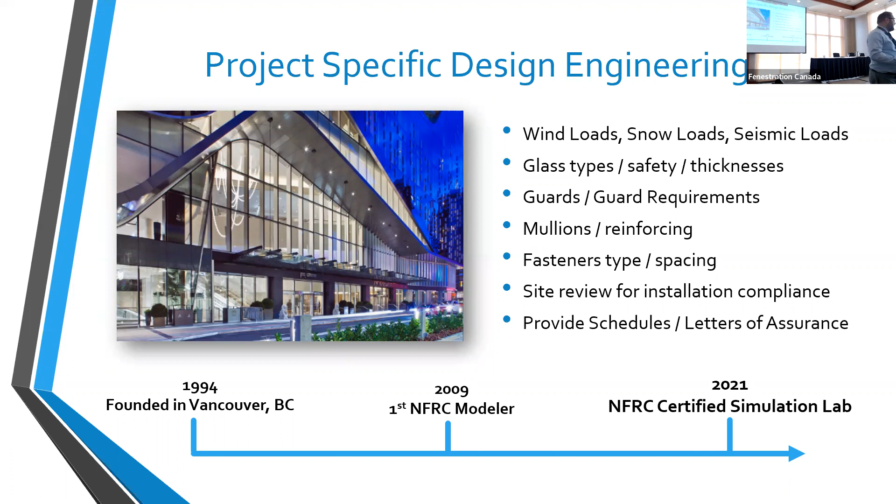So yeah, just to give some timeline of what qualifies us to actually speak on thermal modeling. We were founded in '94. In 2009, we got our first inquiry from someone trying to complete a project in the city of Vancouver, asking about a weird thermal requirement. It led to one of my partners, Ivan Chu, learning about NFRC, calling them up to ask what this thermal thing was. He went down to Minnesota, got trained, and that's how it started. Today we have six staff - one in Germany, Taylor located in Alberta, and the rest of us in the Lower Mainland - who are certified thermal modelers with NFRC. Last year in December, we got the thumbs up from NFRC that we are now a certified simulation laboratory.

One thing I've noticed, especially in thermal, isn't unheard of when you look at the window industry as a whole - we've all heard people say 'we did this 20 years ago' or 'that's how we've done it for years.' Obviously those days are done. We've seen increased industry requirements for guards, structural loads. NAFS was adopted by the National Building Code of Canada in 2010. Energy performance, both for products and whole buildings, has increased over the years - not to mention initiatives like LEED, Passive House, and Step Code. So understanding that there's a continual progression toward compliance isn't new, it's just that thermal seems like more of a newer thing.

On the West Coast, where there's a real drive to be the greenest city in the world in Vancouver, greenest province in Canada, greenest country in the world, everyone's being pushed to be more energy efficient. But the struggle is we want a fast way to do it - just tell me how and I'll do it. I don't think our industry is fraudulent or sneaky, it's just that there's so much information and we're so fast paced that we want to be told what to do. Cities like Vancouver often just say 'do this,' and there's this disconnect in information. That's where we want to come in.

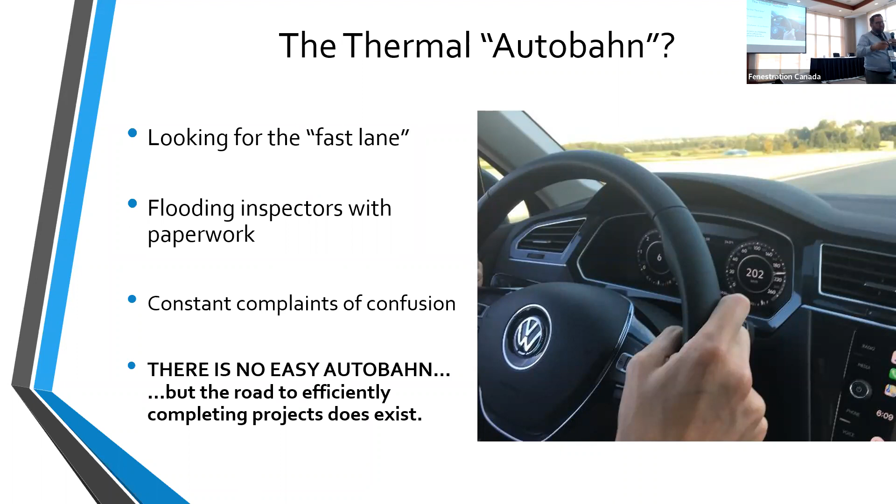First, understand that there's no easy Autobahn. I'm not going to be here and say, okay, do this, you're flying—but there is an efficient way to get this done.

And Taylor actually had a really good analogy when we started talking about how we wanted to frame this. He said it reminds him of Alice in Wonderland when talking to some people—it's like, I don't even know where I want to go at the end, I just know I've got to be thermal compliant. And it's almost like, well, it doesn't matter where you start if you don't know where you want to go. So we're trying to start right from the beginning to help people out, to really frame it around this drive on the Autobahn.

And there's different paths to go—we're going to get to a few different destinations, but on all of them there are some common checkpoints, so everybody is going to play in the same field at the same point. For some of you this is going to be new, for some of you this is old hat stuff.

So I just wanted to take a look under the hood—what is the NFRC engine? Why do we call it NFRC? The National Fenestration Rating Council—what is it really giving? Everyone has seen these stickers before, whether on your windows, at projects, or putting labels on for yourselves. The U factor and the solar heat gain coefficient are the primary energy performance ratings, so any system sold or installed in Canada should have that information.

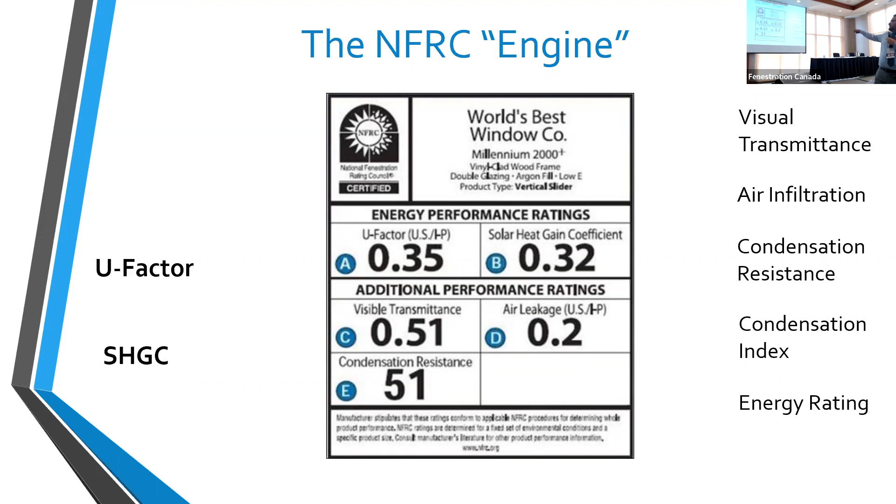Some systems are going to have additional performance ratings—some will have all of these, some only a few. But from our analogy, the U factor is like the engine, and the solar heat gain coefficient is like the transmission. It doesn't really matter—you can be excited about all the other stuff, but if your engine and your transmission aren't working properly, it's like, great, I'm not going anywhere.

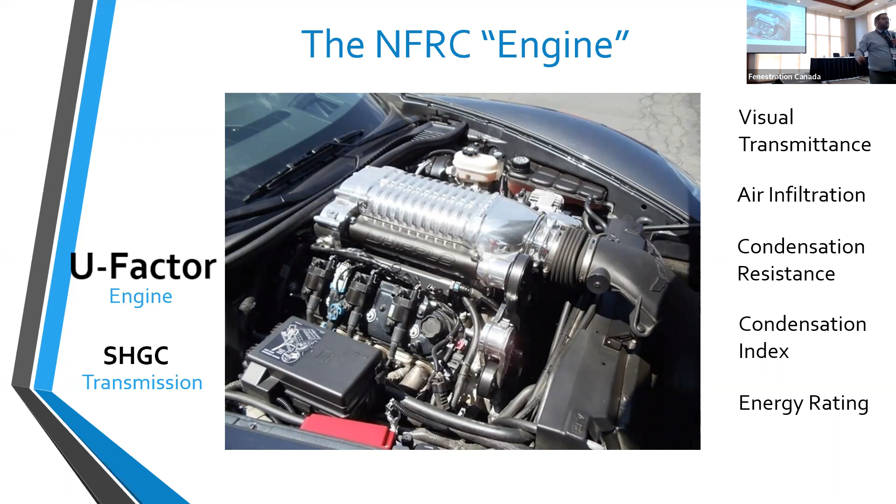And for the purpose of today, because U factor is seen as the primary thing we're asked about most—how do I prove this is energy efficient—that's where I'm at today. So what's the U factor anyway? Well, NFRC gives this definition: it measures how well a product can keep heat from escaping the inside of a room. The lower the number, the better a product is at keeping heat in. Like, okay, cool.

I found this graphic somewhere, and I've been guilty of this myself, of looking at it and just saying, okay, double or single glaze, that was bad U-value. Then we went to double glaze, then we applied a low-E coating. You kind of start thinking of it as a filter, like if we just put more glass, more low-E coatings, it's just going to get lower and lower.

But that's not entirely accurate, because how it's reported is watts per meter squared Kelvin, or BTU for imperial. Up in Canada, we're using that. Watts per hour, watts is joules per second. It's actually a rate at which heat is lost from inside. So think of it like I'm on the right side - the energy performance relates to conduction, convection, and radiation, but the U-factor is the rate at which this happens over time.

Looking for lower numbers can be seen as lower equals slower. So the lower the number, the slower you're going to have that heat loss. That's why we're like, yeah, get that number down. To put it in a complicated way that makes sense to me, it's the heat transfer per amount of time, per area, per degree of temperature difference. So you have those three components, but it's a rate at which it happens.

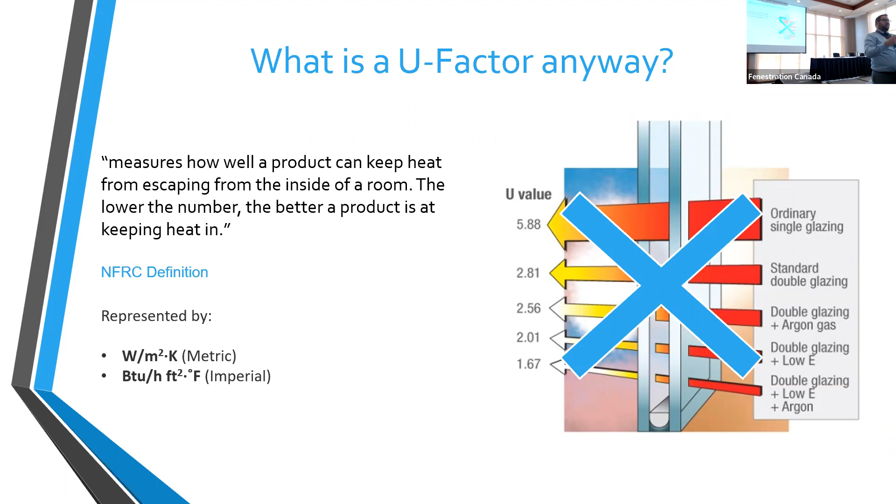So the filter idea is a good way to think about it and also to present it to people, but it's not entirely correct. So here we are.

Why NFRC? Well, long before my time, if you had a product and you wanted to sell it, you'd say, hey, this is rated, don't worry about it. Anytime you changed any little thing, there's a new test, and tests sometimes weren't all comparative. It led to people being confused and frustrated, throwing their hands up, or even just ignoring it - well, I don't have to do it over there, so I sell these windows here. Why the heck am I even doing that? I'm not even going to play in that field.

And I've seen, hilariously, some really old reports with giant IGU units, and that's the reported U-value for a window - it has nothing to do with the frame. Then someone else actually tried their best to come up with the rated size, and I'm like, no wonder that guy's business went out from under him. He couldn't compete, trying to stick to the rated size. So NFRC really came out to benefit both our industry, to be able to compare apples to apples, and the end user to be able to make the best choice of what's the best window.

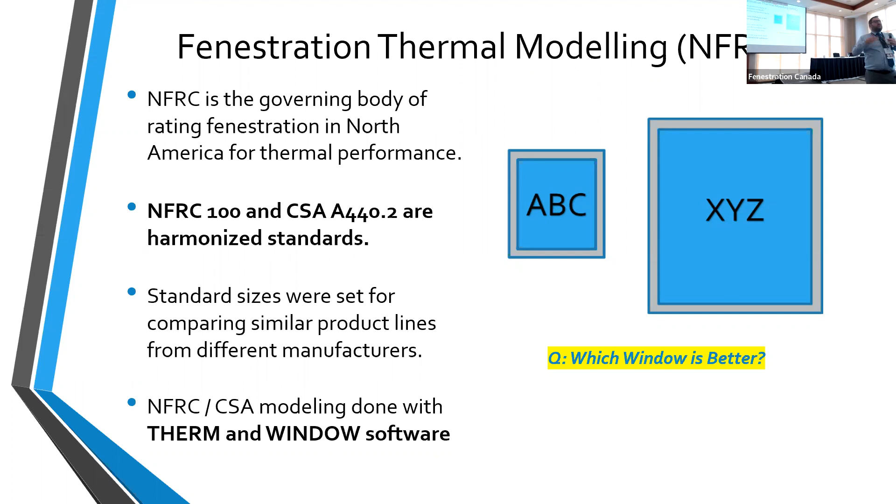To be certified, you actually have to go - well, they did Zoom over COVID, but we all go to Minnesota, we do training once a year, we do a test. Also as a lab, we do another test. So we're always kind of being vetted that we're doing it appropriately, because material properties change. Some modeling things have changed over the years, so there's things you have to keep up on to make sure it's accurate.

And as I said, there's standardized sizes, and these have also changed over time. CSA was slower to adopt a dual action window than NFRC, so when we're comparing everything, like a tilt and turn, no matter what your product is, if it's rated or modeled, it's to this size under NFRC or CSA. The U-factor is used to answer the question: how energy efficient are my windows, based on these sizes.

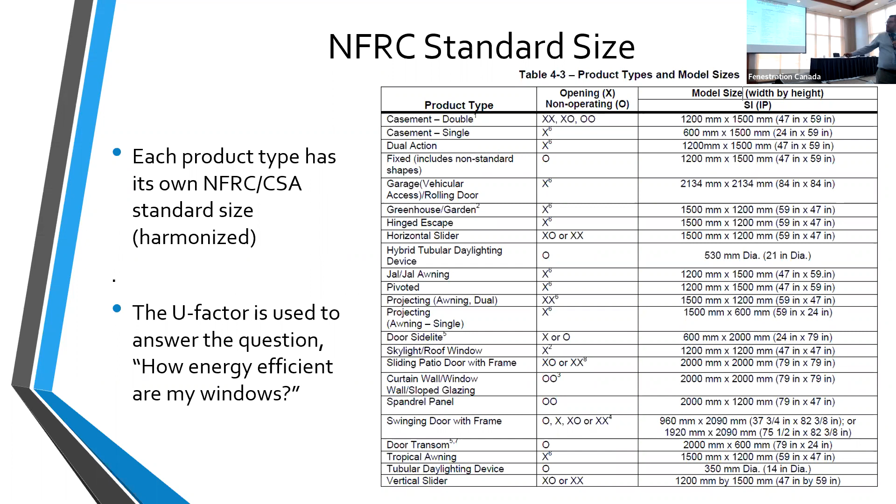So just to get your breakdown on how a U factor is calculated. Each product consists of 3 different U values. Essentially, you have the center of glass, which is going to be your best performing. That's like when someone has a double glaze with a single low E.

The next thing to adjust to try and get the biggest bang for your buck is an interior low E, or going to triple glazed. That being the lowest is always going to perform better than your frame. And I say that always. Maybe one day I'll be wrong, but as of yet, I've never seen a frame outperform an IGU.

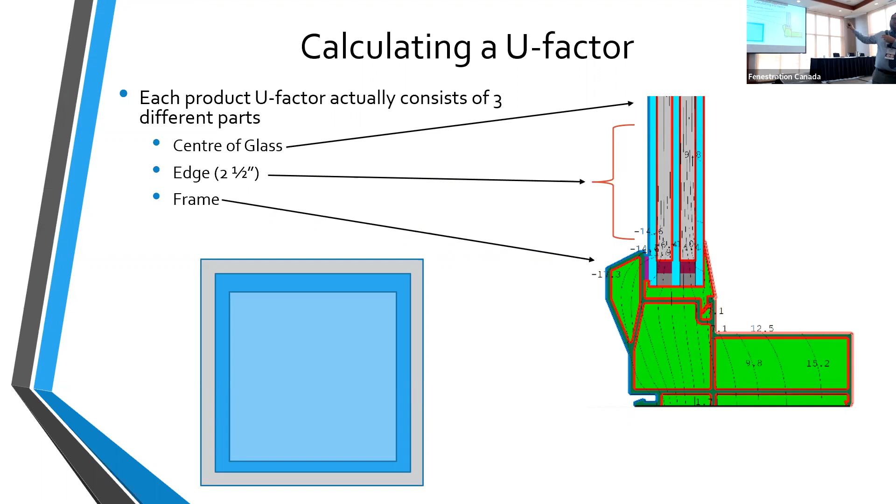And then there's this edge difference and the frame, as I was saying, was the worst performing area. So there's this, in general, this 2.5 inches where it's this mixing of the poor and the better. And all those go into a final U value number, and each side of this frame. So you'd have one of these models for the head, both jambs, and the sill.

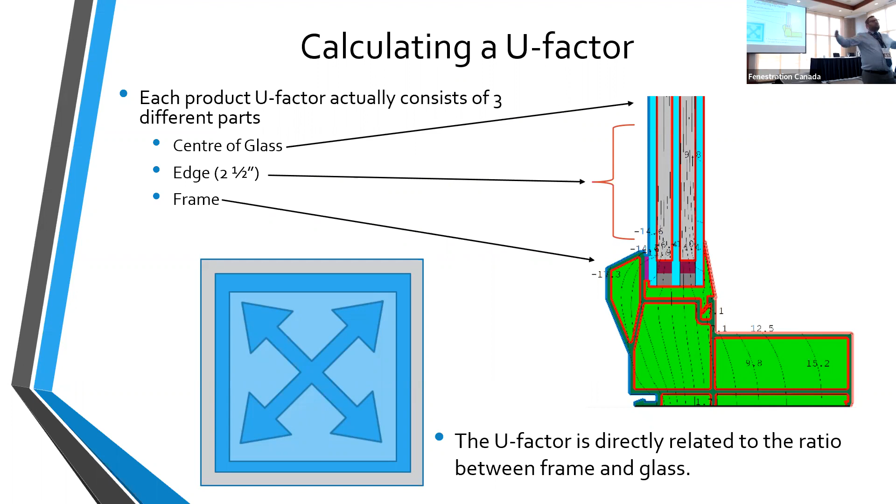And as I said, it has to be sized to a standard size, because the U factor is a ratio, like it's influence of glass to frame. So if you had a huge window, it will inevitably perform better than one that's smaller.

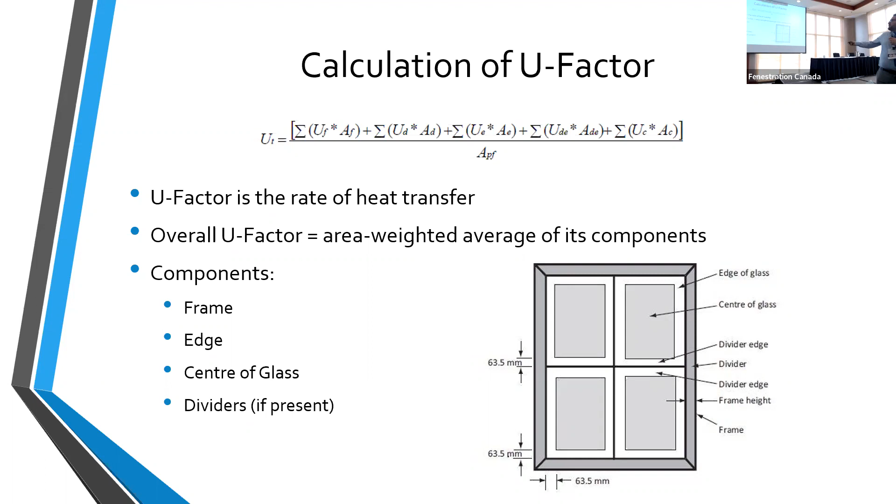So just to show you the math behind that, explaining what I have, this one actually has a true divider, so you would have more models in it rather than just the 4, but it's the same thing. You've got the frame, the edge, the center of glass, and that's U value total over the area of each part. So it's kind of like an area weighted average of each component to a standard size.

And then this is just to show you as well, we just took a random fixed window. The standard size is a width of 1,200 millimeters. And we just said, okay, what if the width's really small? What's our U value? You can see that the smaller it is, the worse it is. And as it comes down, it gets better and better because that ratio increases. But everybody who's reporting on a frame would be somewhere on just that 1,200 line. So that's the standard size. That make sense? Yeah? All right.

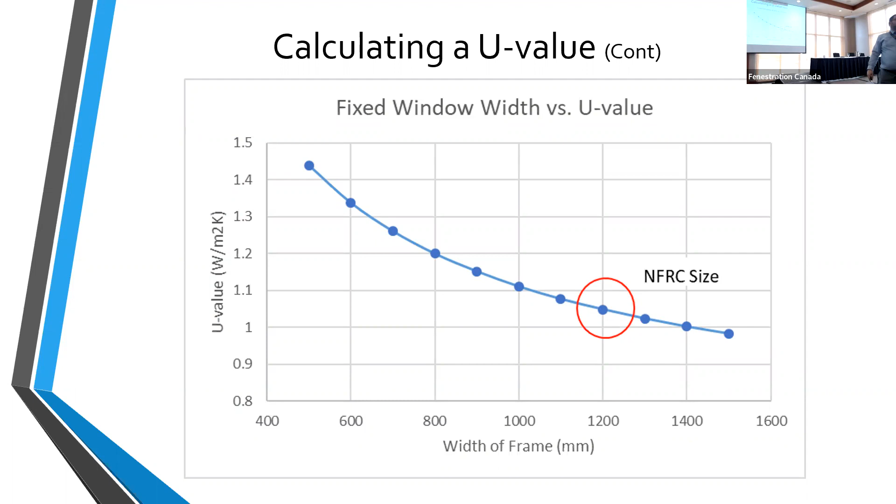Oh, is there a way to get rid of the little thing? If not, it's okay. It's all good. Oh, there we go.

Okay, it disappeared. So, like I said, we wanted to talk about those common checkpoints. Really, thermal modeling software is to be used for all products sold and installed in Canada and the US. That's where we start.

If we want to give both our end users what we say we're giving, if we want code officials, we want city municipalities to just continue to let us sell our products. If we want to sell a better manufactured piece to window suppliers, maybe you're a supplier of a component or you're a supplier of frames and stuff, all this stuff can be modeled previously to even accepting a project. And that's what we see every day in Vancouver and in British Columbia.

So the nice part is it validates that thermal performance. It fairly compares between products of the same type, and it's recognized by everybody, really. And I know exactly what I'm looking at. Architects are starting to understand what they're looking for. And the governing and regulatory bodies are really asking for these values.

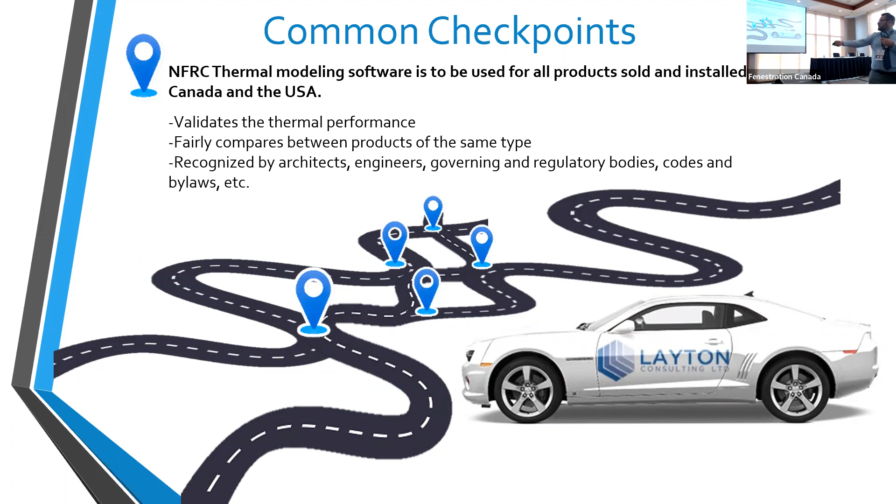There we go. So some of the dangers we get into. I've lost the notes. All right.

The alternative modeling methods. So when I went back to some of that confusion, I put HOT 2000 in here. HOT 2000 is not a reporting tool, but it still catches me off guard. I'm dealing with a project right now where an architect says to me, well, I've got the U values, don't worry about it, gives me a HOT 2000 report. This has just been selected by an energy modeler. This isn't representative of anything of what you're putting in. But he was convinced that was the windows that he was getting.

There's other energy rating software. There's stuff that exists. I don't know the names of all of them, but I've seen people use things. Some are fairly accurate to what we see, but they're not consistent, nor are they validated. I see a lot of manufacturers like dynamic Excel spreadsheets where they can have a customer or a consumer pick the frame, pick the glass, and it spits out a U value.

That's a great place to start. But because of that need for validation—and it's sometimes quite accurate—it should be seen as an estimating tool, especially if you're going to sell a product. Like, okay, I don't have time to look through everything, but I want to know, am I going to get there? Am I going to pass? And if the threshold number is 1.4 and you use the spreadsheet and you're getting back a 1.2, you're like, hey, no problem, I'm good, I know where I'm going.

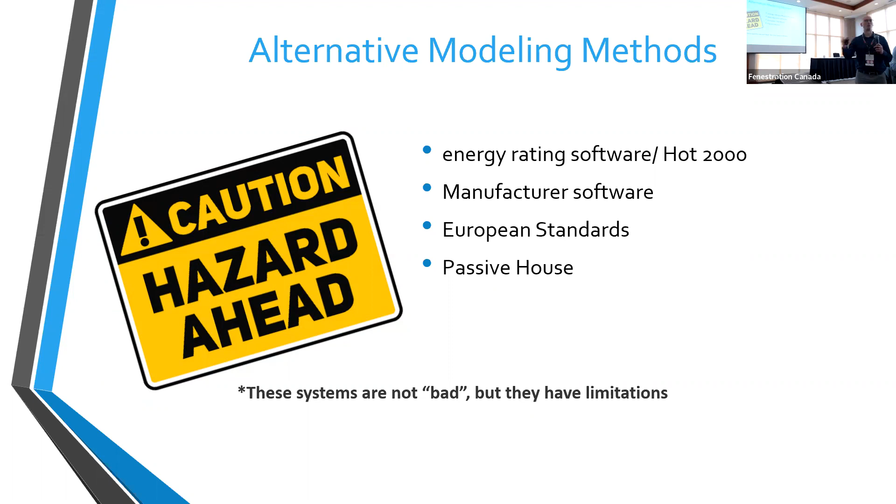Yeah, so John's given a really good overview of the North American way, the methodology of calculating U value. That's not the only standard way of calculating U value in the world. As many of you know, there's the European way. Passive House is probably the most common. Many of you have probably been approached or talked about how people have said, oh, their U values are way better, or I have to import from Europe, or whatever, and they're just not the same. I guess is what we want to get to. It's not an apples to apples comparison, and we're just going to touch on this briefly.

RDH Building Science—Robert LePage, Daniel Haaland, I'm sure many others at RDH—have worked extensively on this and have given some really good presentations. We just wanted to go over some of the material they shared, and give credit where credit's due there.

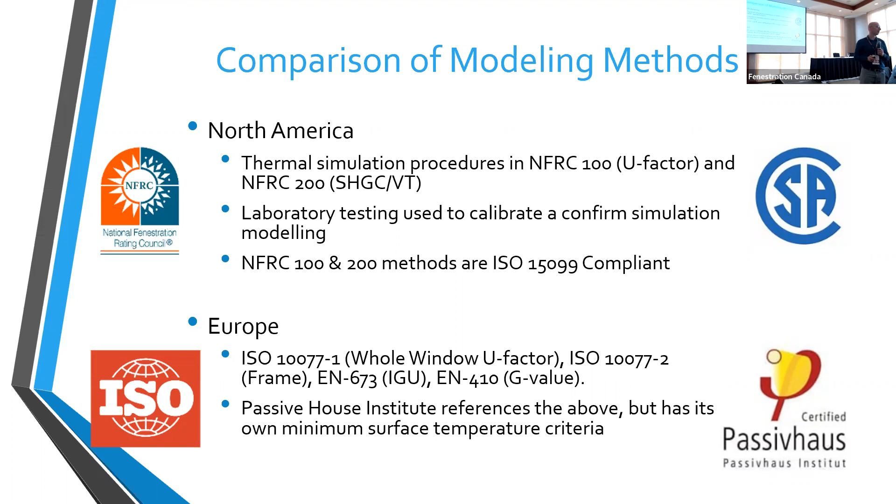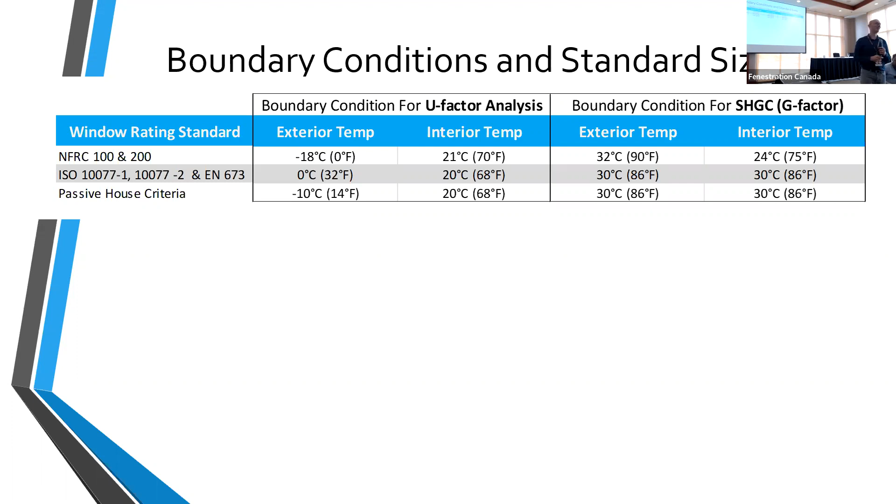So to touch on a few of the differences, one is their temperature difference from outside to inside is different. With NFRC, the outside temperature is modeled to be negative 18 degrees Celsius, and the inside is 21 degrees Celsius. In Europe, it's a different temperature differential—it's either 0 or negative 10. There's nuances there, just so you know that's one difference.

The standard sizes, as John talked about, each window type has a standard size here in NFRC. They also have a standard size in Europe. They do not always match up. That would be a nice thing to harmonize, but it's not. So obviously when you have bigger windows, which oftentimes over in Europe their standard sizes are larger, it makes it easier to get a lower, better U value.

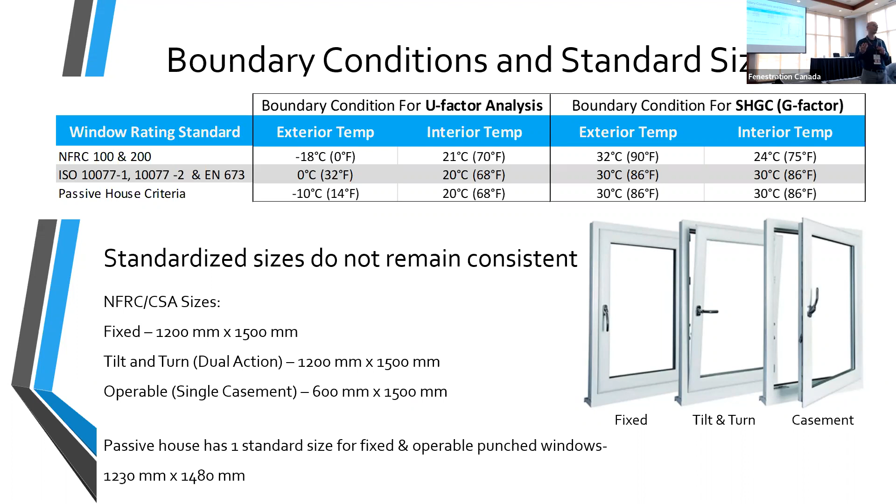The air gaps—you might notice in Europe their IGUs seem to have a lot wider air gaps in between. It all comes down to how they calculate their center of glass U values; they follow a different standard. As you can see from these charts, NFRC hits its sweet spot for double glaze around a half inch. Passive House can get a lot lower U factors if they continue widening that gap a little more, so they bottom out at a different sweet spot.

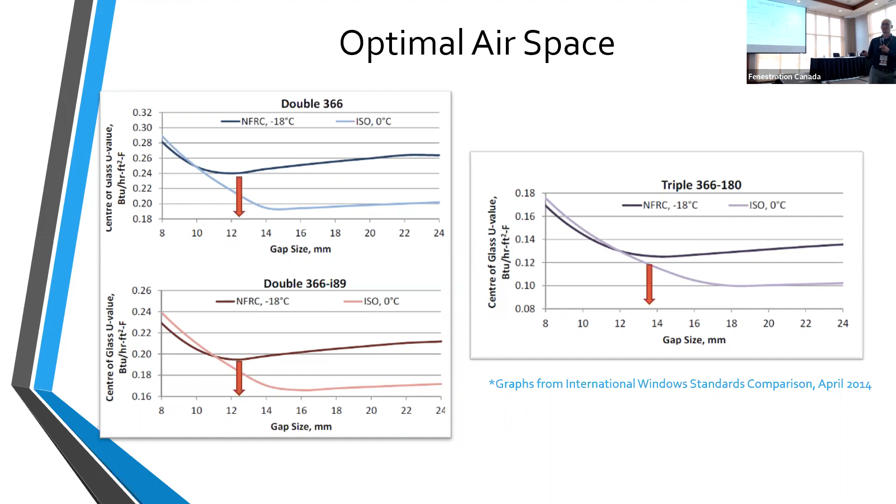So that's the point where we like to hit for double glaze in North America. John talked about the three main areas with NFRC—you have the frame area, the edge area, and the center of glass area. Passive House is different. They have the frame area and the center of glass area, but those aren't necessarily calculated the same. And for the edge value of that transition area, they use a different linear value—it's not actually an area, they call it a psi value.

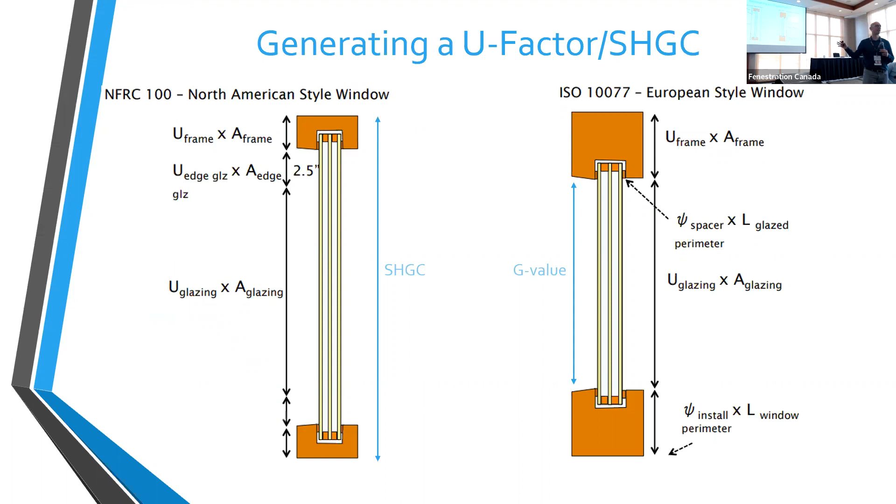Another difference is the solar heat gain coefficient. NFRC takes into account the energy that's passed from the solar heat gain through the frame, and Passive House doesn't really touch that in their calculations. So all kinds of differences.

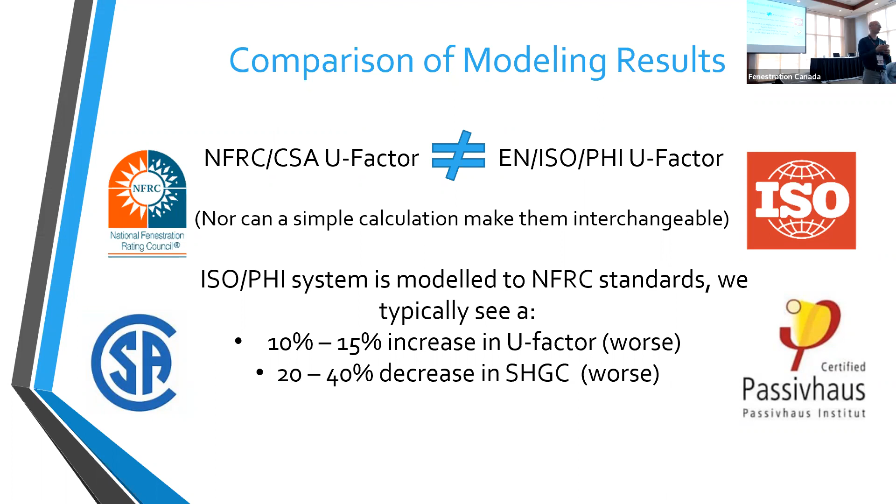And we kind of expected, because what we've seen is generally Passive House reports lower numbers, so better U values, but then when we model in NFRC, it jumps up a bit.

Which is often disappointing for people who are importing over from Europe, and then they find out their windows aren't that amazing. But looking at different windows, more standard North American windows and standard European windows, they found that there's a difference both in the positive and negative direction.

It's hard to say which way it will go, but they came up with up to 18% differences, and that's, we typically see around 10% difference, but it can fluctuate between 10 to 20% difference in U factors. And it's not better or worse. It's kind of like what my mom used to say. She summarized this very well when she said, Taylor, you're not better or worse than the other kids, you're just different. So yeah, that's how you can look at Passive House and NFRC.

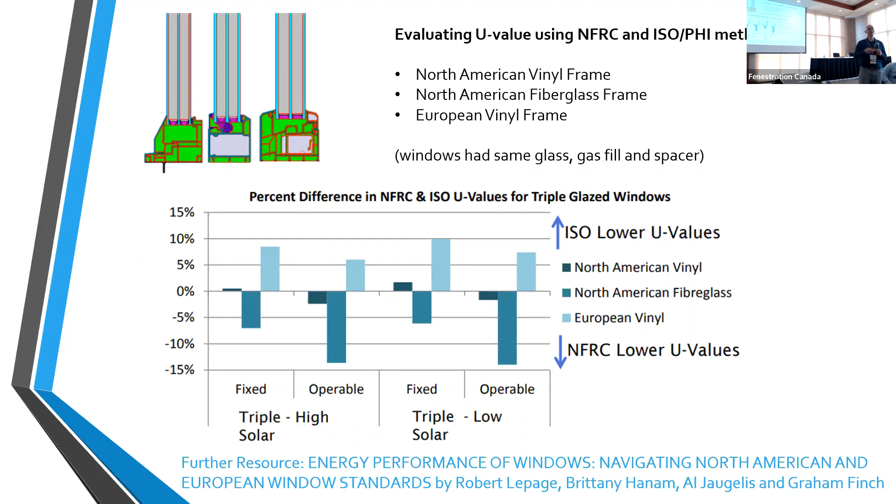And for the rest of this, we'll be focusing on the North American standard, NFRC, as well as CSA, as that's what's relevant over here. But we just wanted to touch on that for you. So let's take a little pit stop to...

We could talk on this a fair bit, but we wanted to bring in the real experts. John at Keystone, they've been in the industry a lot longer than we have, and they're IAs, so they look at all the modeling that comes in and all the tests that come in, and they certify those tests and modeling that come in, so they really know what they're talking about when it comes to NFRC and CSA standards. So John, I'll hand it over to you. I appreciate you coming in and joining us for this.

Thank you, and thank both you guys for the opportunity to just walk through a few slides together about this common checkpoint along our highway to compliance, and that is third-party certification.

All of these programs that are becoming more and more important to fenestration manufacturers in Canada are qualified by third-party certification. So what is third-party certification? It's an independent company that evaluates the reports, makes sure everything is done properly in accordance with the standard, and then certifications are issued. The ability to use the certification labeling is granted, and the labels go on the windows, indicating the ratings and compliance with requirements.

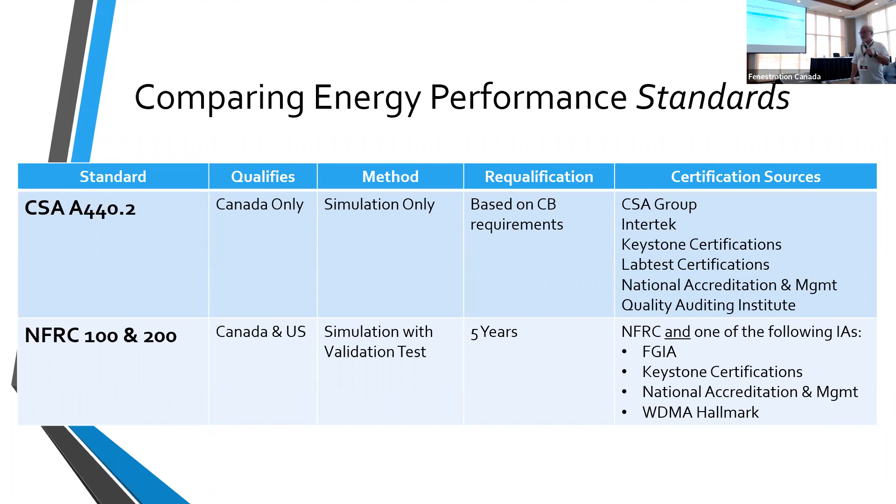So if you're only qualifying your product for Canada, either as a manufacturer that needs to qualify their products for these programs, or an extruder that wants to qualify their products designs for their fabricators, the CSA is a nice option and significantly less expensive - but only if you don't have to qualify the products for the US.

Just one last slide. The way that the certification labels work, you apply them in the factory and they go out the door with the product, and they sort of take their qualification with them. So a building official or a building owner or an architect can see, on the products being installed, the ratings and be able to verify they are in compliance with whatever the requirements are.

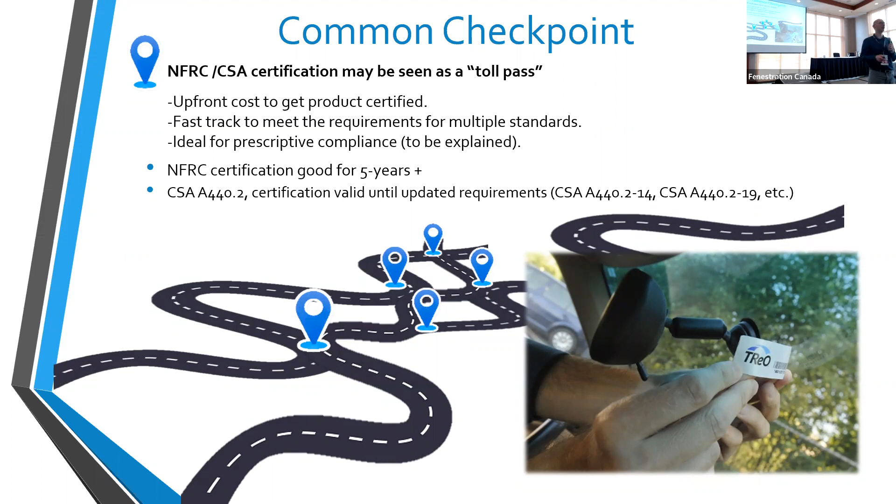We do like the analogy going along with the car analogy that the stickers on your windows are a lot like the stickers that you might get for a toll road, where you can pay for a toll pass, and then you just put the sticker on your windshield, and then you don't have to stop at the toll road entrance. You can just fly by and you're good to go. And that's a lot how certification works - you get those stickers, you can prove that you have done the work, you've proven up front that those are the values that your numbers are getting, and you're off to the races.

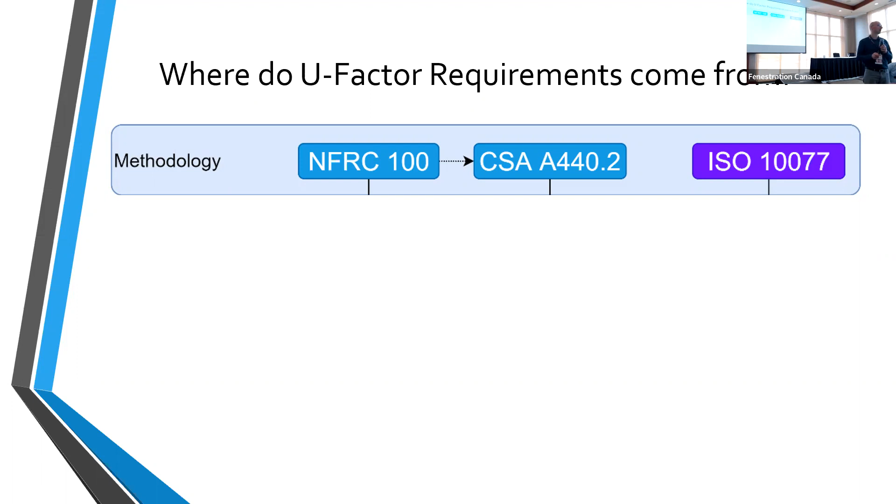So as far as we've spent a lot of time talking about the methodology of how to calculate U factors, and as we've touched on, NFRC and CSA, they're very harmonized. CSA is a little lighter as far as cost-wise, but it's restricted to Canada. And then there's also the ISO 10077, that's the European side of things, which relates to passive house. But those are the methodologies that we follow.

Now, the methodology leads into the different requirements. So once these guys figured out a methodology, then the code writers realized, oh, we can write this into code. We can create standards and requirements and hold you guys to these standards. So there are many different codes, and we're going to get into that a little bit.

The main ones that municipal and provincial codes are written around are the ASHRAE standard, there's the National Building Code, the NBC, and then the National Energy Code of Canada for buildings, the NECB.

And then you have, aside from that, on the other side of things, you have sort of the incentives, going above and beyond the base requirements, and that covers Energy Star, other grants and incentives. They have different requirements that your clients might want to meet - they might want to ask for a better U value than the actual standard requires. And passive house, we would put that in there as well, because lots of people want to shoot for a passive house standard house, and then they would have to go a different route, a different methodology for certification. But we clump that in with the rest.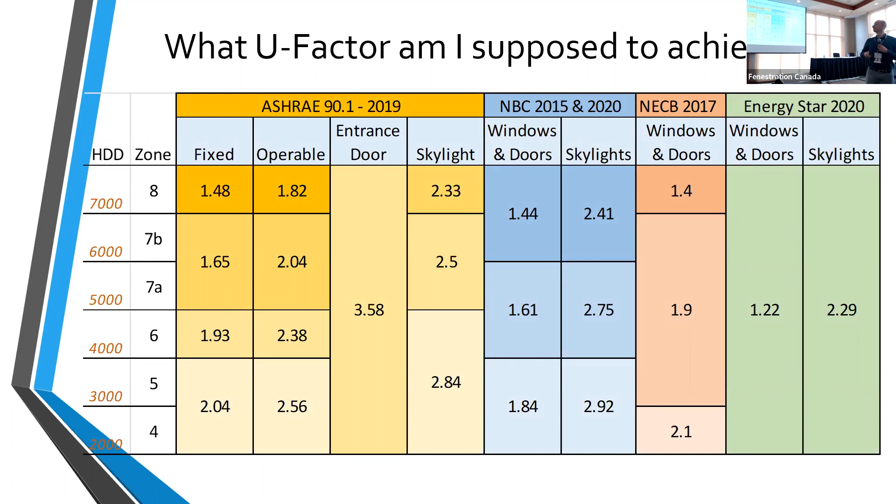There's a lot of other things I could go into there, but that's all I want to say about that. Aside from climate zone, you also have different adoption rates within the provinces, and that is very different across the country.

A coworker was joking that these are very fitting for Pride Month this month, because they're very colorful, all different. Every province is kind of doing their own thing with the codes, and they're at different rates of adoption.

I think New Brunswick just adopted the National Energy Code, NECB 2011, just in 2021. And then you've got different ones - I think Ontario is already talking about adopting the NBC 2020, and they have a tiered system, so you have different tiers within the code that you're required to meet.

So after seeing all this, I'm sure it's much more clear now exactly what U factor you need to be. We shared this mostly just to give you an understanding. I've definitely had times where I find it frustrating that the spec writers and architects actually don't know what U factor they want many times.

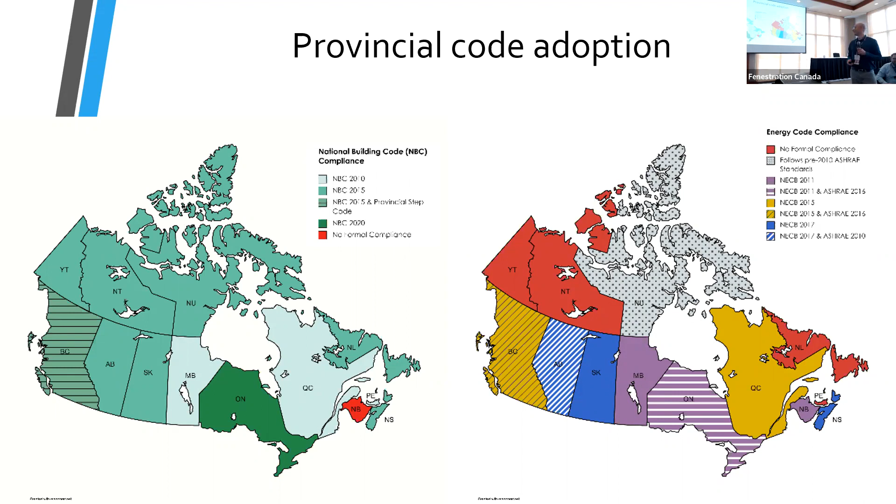Going off of that, just to make things simpler here, these are more diagrams from the codes. Just to say, okay, if you have a window and it doesn't meet our designated requirements, what do you do at that point?

Luckily they do have some understanding that these cases might arise, as I'm sure you guys have come up with. So obviously the best path is everyone has stickers on their windows - all the windows meet the required targets, and you're good to go. You're cruising in the fast lane on the Autobahn, you just cruise on by and they don't ask any questions.

If, say for instance, you have one window out of all the windows you want to install, and it doesn't meet the specified requirement, what do you do then? They have different trade-off methods, and we'll get into that a little more. There's also a performance rating path, and this is where you get really into the nitty-gritty for that specific project and go into a detailed calculation, so you know exactly what the windows are performing at for that particular project.

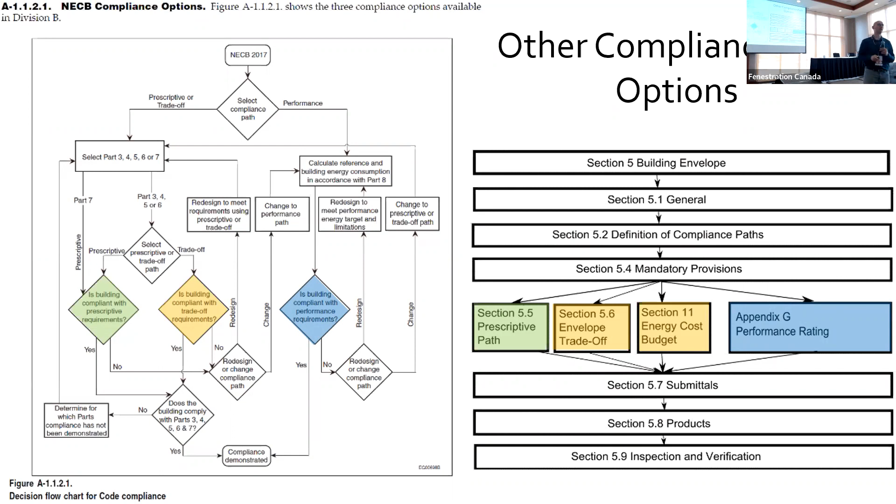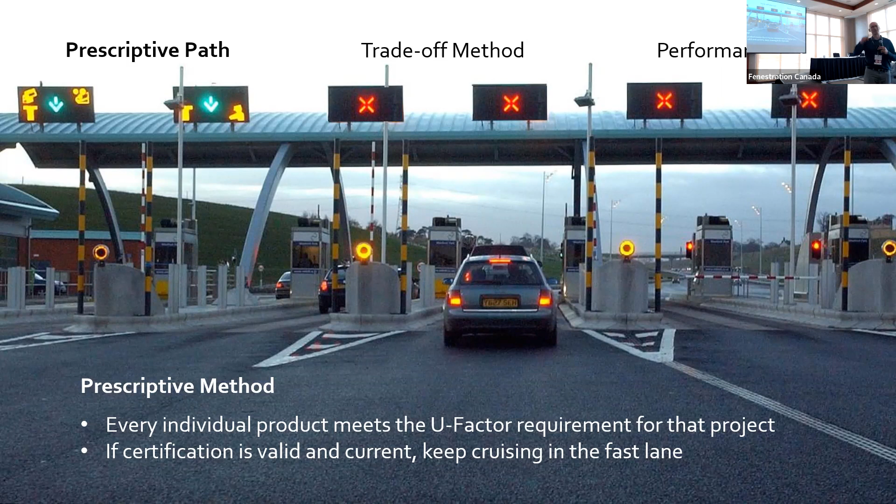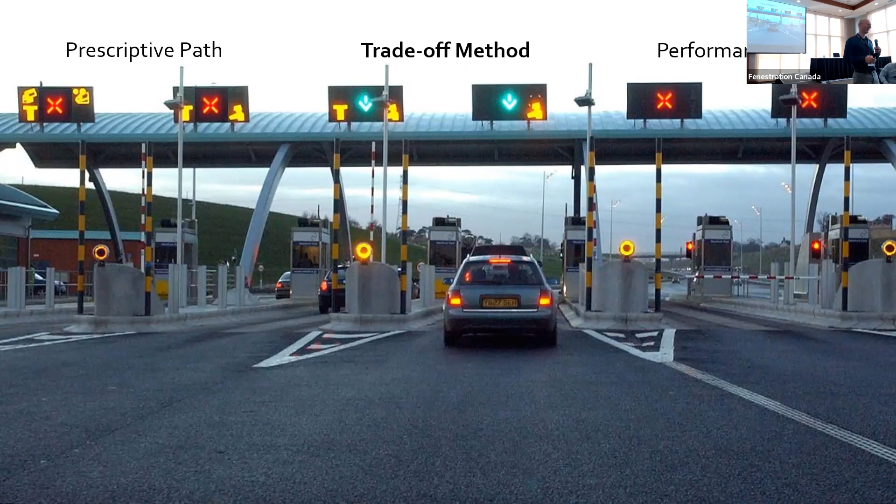If we look at this as different lanes, there's the prescriptive path, as we talked about - that's the sticker on your windshield, you just keep cruising in the fast lane, the Autobahn. There's a sticker. Then there's the trade-off path, so let's talk about that.

There are many different ways that they talk about calculating this, and I'm not going to get into all the different ways because, as you know, there's a few codes and they all have their own particular method. Sometimes you can trade off, say for instance, a high efficiency heat exchanger for lower performing windows, or better roof products to give you a little more leniency in your windows. Things like that.

Sometimes you get more points. It's like a game where you get points for having really high efficiency windows, and then they take those points and say, well, we want to have an open car garage over here or something, where they can kind of play the game. They have building energy modelers who can play the game with these different trade-off methods, and we'll let them play that. You guys just need to know what value your windows need to meet.

The most simple method to look at is if you're just trading within the window category. Say you have a fixed window that performs really well at 1.2, but the target is 1.4, and you have a casement or vent window that performs at 1.6. So your vent window doesn't meet the target, this doesn't work - but if you have a lower percentage of square footage of casement window area versus your fixed window area, which is usually the case, you can do a simple calculation: sum up the areas covered by each window type, multiply it by their respective U values, and as long as that is below the requirement, then you're good to go.

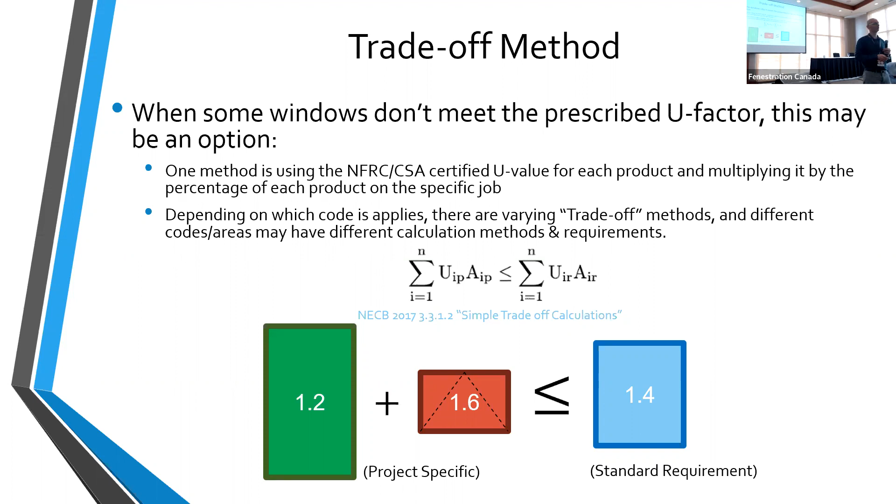The nice thing about this method is you don't have to get whole new certification. You can use your certification, your stickers on your windows, you're good to go. You just need a little extra math to make things work if you're going to go this way. Oftentimes they don't require an independent reviewer or engineer to sign off on this - that's not always the case, but oftentimes that's a calculation you guys can do. You can use your higher performing windows to offset your lower performing windows.

So those are the pros. The cons are, as far as if you were to make any changes on site - say they want a specific glazing type, or they want reinforcement in their windows or something like that - then your stickers can't actually apply. So anything like that, you would need to get it remodeled again anyway. So it has some limitations there.

Another potential con - say for instance you have this fancy project with massive windows that are way above and beyond what the NFRC size would be. The U factor you're reporting for your windows doesn't necessarily reflect that, because your U factors are just the U factors on the stickers. So it doesn't look as great as it could be - it could be a lot more impressive if you calculate this specific U factor for those large windows.

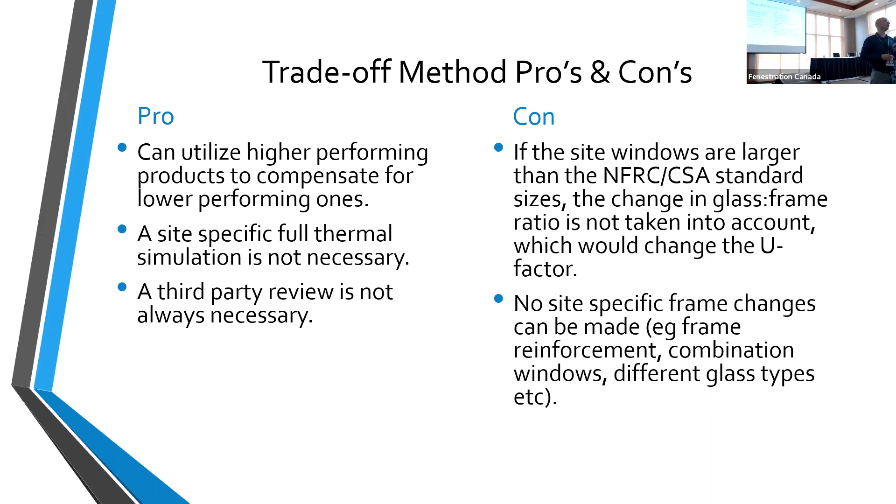So that brings us into the performance path, and I'm going to hand the mic back over to John. This is the sandbox we've been in for quite a while - the lane we've been in - and John really helped develop this side of our business. Thanks, Taylor. We're almost done, guys. Hopefully we've been at least some help in explaining some of this, and getting both your minds around it and appreciation. Certainly we appreciate what you're having to face.

So the performance path - that's one name. We see area weighted average, that's another name. Different places, different codes or regulations call it something different, but it's exactly what's intended, what Taylor's saying. We see these type of buildings with giant windows, huge sliders in West Vancouver overlooking the water, Squamish or Whistler - you want to get that great view. We're obviously not going to see these in Langley where people can look into my house while I'm changing, but you're going to see these in high-end homes. And I appreciate it - they're like, why do I have to compete with someone who's just putting small, regular sized windows into a residential home?

This also takes into account that a lot of these aren't necessarily residential products. Some of these are like a curtain wall product being applied, an aluminum system that's obviously going to perform poorer than a traditional vinyl or even some fiberglass systems. So it really is designed to allow you to use the actual installed size. What we've kind of developed - I went to the city of Vancouver, who were the big pushers, and I sat with them. I said, what do you want to see?

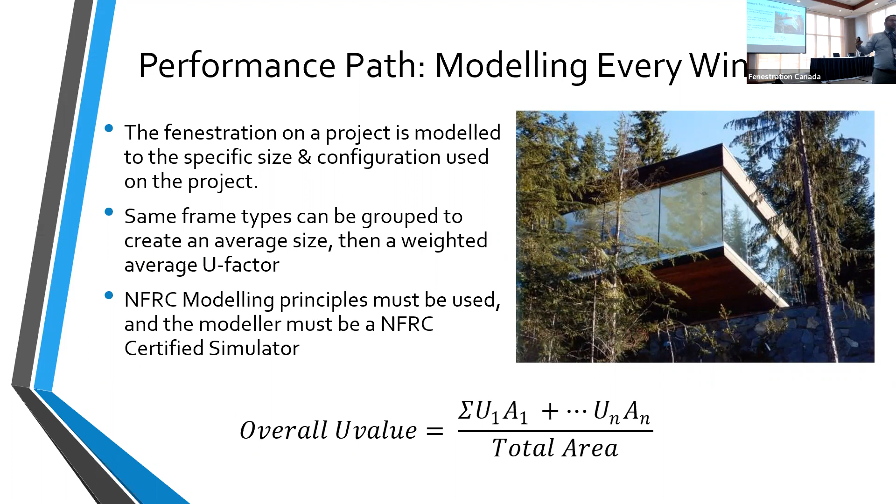We still follow the NFRC modeling procedures, written in both the VBBL and the newest building code. It's a third party—an engineer or an NFRC certified modeler—running this and essentially vouching that this meets what's actually installed.

Here's an example of a project with a whole bunch of different windows and doors, plus some curtain wall. We take the shop drawings or window schedule and find the width and height of every single product, grouping all the ones that are the same together. If there's a corner that's SSG, that becomes a new group—one SSG on each, or something like that. So every little variable gets grouped into its own thing.

We break it down to an average width and height, and establish that from that size in each model we get a U value for each, multiplied by its percentage of area, which is then added together to give you one U factor.

What's most challenging from our perspective is when an architect, or even building officials, or especially an energy auditor says, I just want this U value—with no concept of all the information going into that one number.

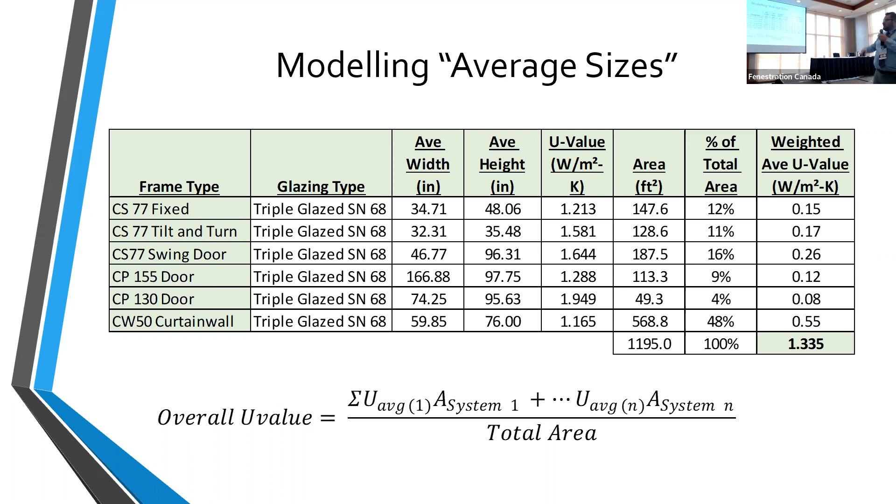The best thing we try to do with our reports is make it so people can walk through and appreciate that just getting an email saying 'my U value is this' is actually doing everyone a disservice. The ability to walk someone through how much information goes into that helps everyone in the industry. So we have these thermal reports.

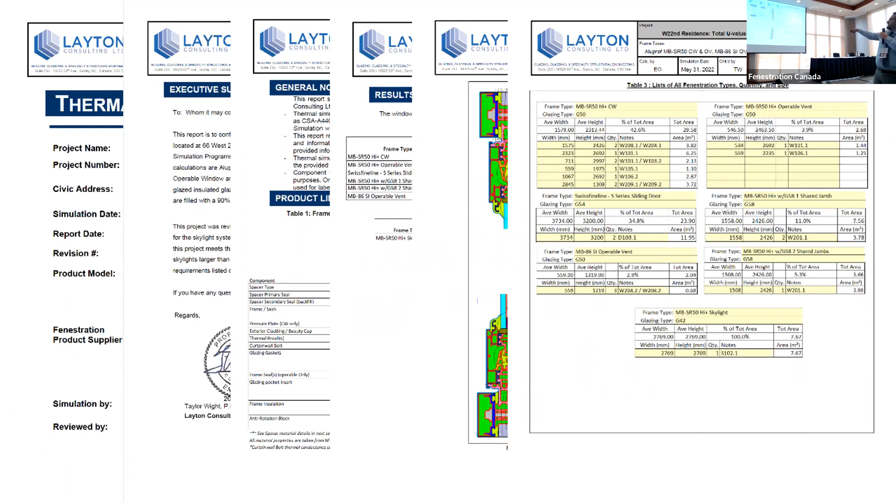Here's a few pages from ours. We've got the isotherms—kept most things covered up, but there's a lot required to be put in there, like the specific address and specific project name. We have the actual calculation and the results as well.

The professional reports or energy compliance reports have several things—not all identical across the whole country, but these are the most consistent: we're providing a professional seal, stating which certification test it's current to, and if there are rated products already, we'll list those in there.

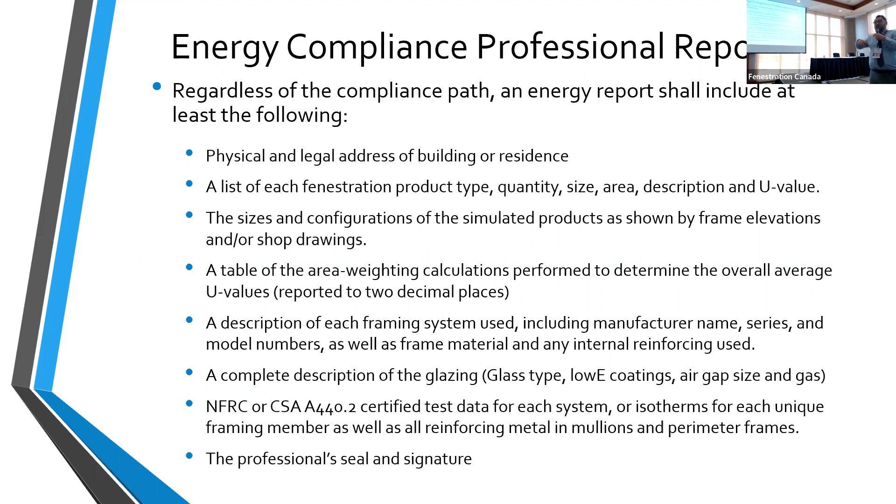A description of each frame, and the IGU type—since you can have a whole bunch of different IGUs in one project—so it gives all that information, and someone isn't just getting a printout that says 'that's what it is, don't talk to me, don't worry about it.' It's about getting past that communication breakdown and frustration we've seen.

From our perspective, and the same as any other certified simulation lab—whether you find someone locally or elsewhere—we're all going to need the same things.

Just to start doing thermal analysis, we need CAD drawings. I've signed a lot of NDAs because I know it's important—it's your product. When I'm modeling something, it's yours, and at the end if you want all the files I did, and you know what to do with it, I'm happy to give it to you. But I need the DWG or DXF files in order to actually create the models that go into the NFRC programs.

The bill of materials is so important. Sometimes I get told, 'it's insulation,' or 'it's a gasket'—I'm like, cool, but which one? It gets to the point where I'm taking a screenshot of the approved materials and asking them to highlight which material, because I can't guess. I need to know what it is. The best thing for you to do is give me as much information as possible.

The IGU makeup—your spacer bar, air gap, gas, widths—I need those dimensions, especially if we're doing a site-specific project.

To reiterate, we don't provide labels. Sometimes we're asked, can't you just do the modeling and give me a label? I can't—it's not my role, and it's not what I'm permitted to do by NFRC.

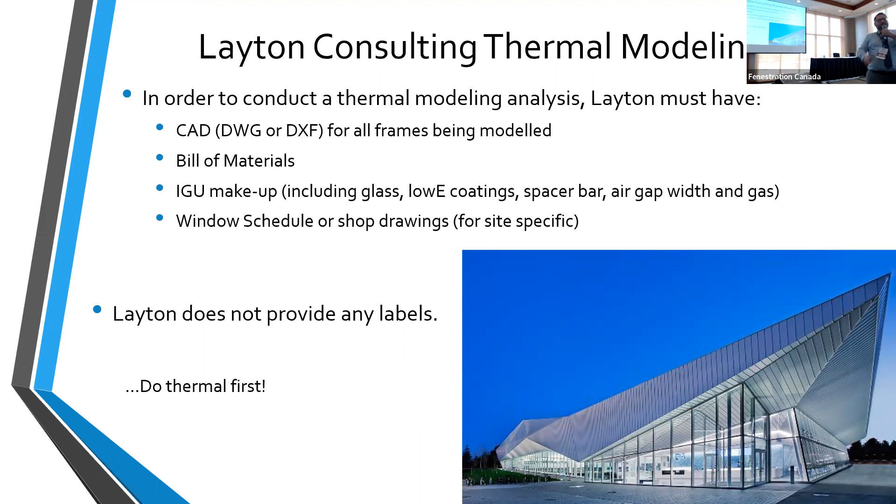So you can't use that report and go sell your product anywhere—you're only getting the U value for that location. It's not like you can't do anything, it's really just a different path. You'll never get to the speed of the Autobahn that you will with certification, but there is a way to continue to produce, work, and do what you need to do in order to get projects done, so you can get paid, so we can get paid.

Hopefully we've given you a good overview and we'll get you through this to the end.